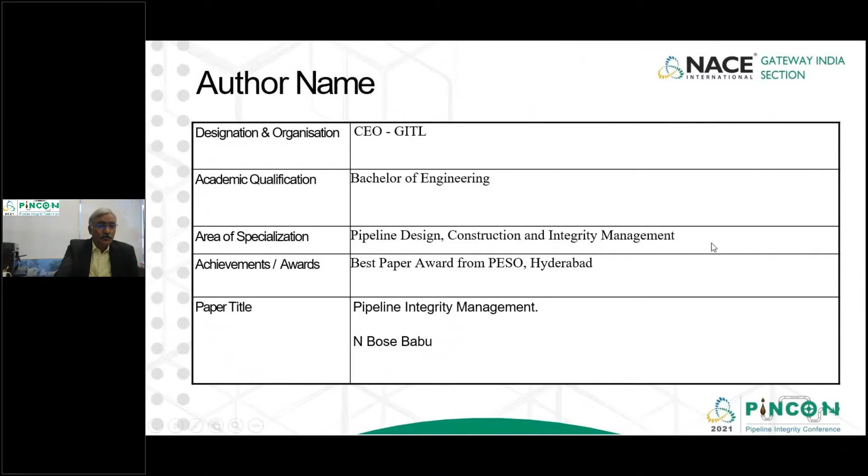First, let us understand what is pipeline integrity. There are so many definitions available in pipeline integrity, for example 32 comprehensive definitions from various authors. But what I like the best and the easiest to understand is: a comprehensive, systematic and integrated process that includes all the activities required to prevent a failure, because that is our main objective.

If you see this picture, I think it answers so many words, because I call it a very important picture, which is seen and unseen. What you see is very small, but what is hidden behind is very big. That's where I think integrity comes into picture.

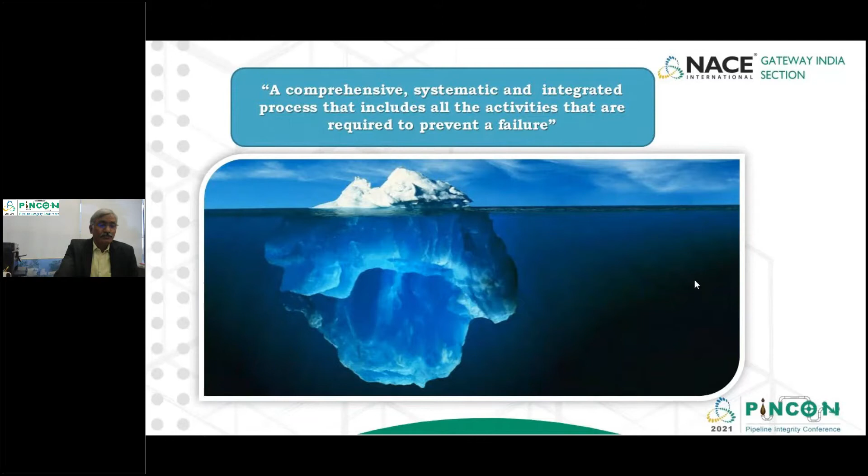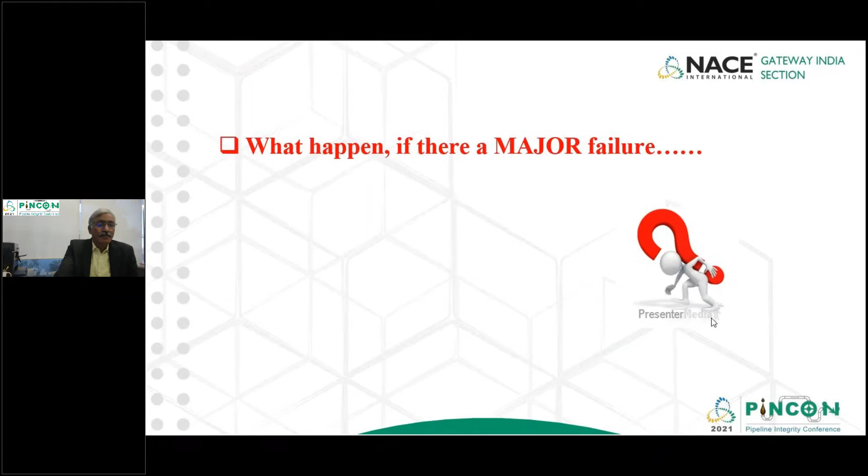So let's think what happens if there is a major failure, because we as operators or general public are concerned about failures. What happens if there is a major failure or rupture? It can be loss of life, loss of property, and damage to environment—all three can happen, or maybe one, because there is a loss. So our job as integrity management engineers is to prevent all these things and safeguard the public.

Now let's come to the few elements of integrity management. Integrity management is very clearly defined in ASME B31.8S, 2004. And even now in 2012, the Petroleum and Natural Gas Regulatory Board has already notified the regulations for integrity management. It covers things very simply, easy to understand and easy to implement. In fact, integrity program is not such a complex thing.

It comes down to 5 main elements: integrity plan, performance, communication, management of change, and quality control. These are the key 5 elements, because the entire process runs based on the PDCA cycle: plan, do, check, act. It's as good as what we follow in our QMS.

If you see the entire integrity program, it is defined in a process flow. It's very simple—the entire integrity management program runs only in this flow diagram. If we go through it, everything is laid out here as headlines.

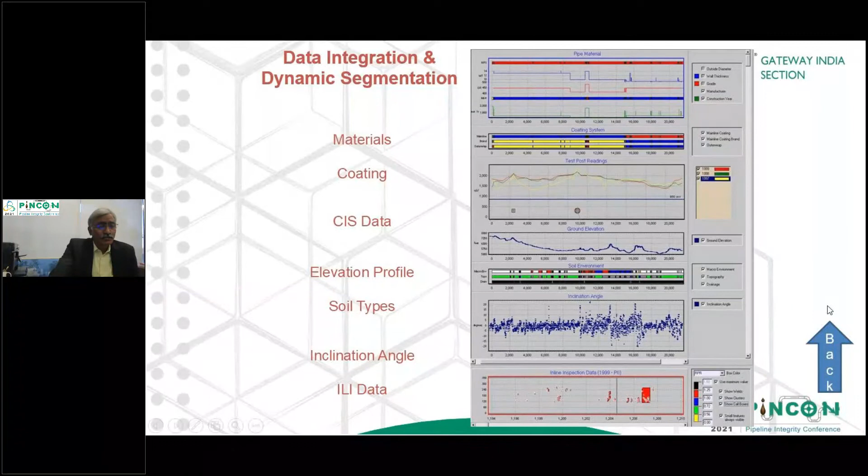If you see this picture, when we want to really apply proper integrity management, we need to have a comprehensive overall picture in mind—basic information of pipeline materials, what type of coating you have, what type of soil conditions, what is the profile of the pipeline, and various other data, once you start the baseline data like ILI, geometry, or as-built data. If this information is made available, only then can we start the integrity process.

Once you have this kind of information put together in the proper format for the right kind of decision, then you should start looking at risk assessment. So what is risk assessment? Risk assessment can do a lot of things for integrity engineers. First, it will give an idea of where the next failure will happen, because it just gives an indication—it doesn't tell anything exactly. Where are the hotspots?

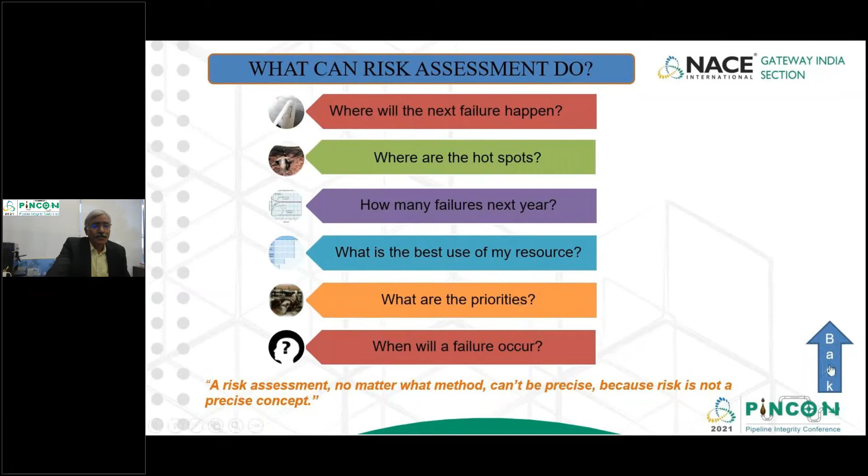Because you cannot look at the entire pipeline project, you have to identify the hotspots in the line where you need to give your attention, and how many failures can take place, because it gives some idea. And how best you can use your resources, because you have limited resources, you are not given resources to take care of the entire pipeline. So you have to prioritize your activities, and accordingly do the failure analysis, and then prevent a failure. So whatever the best risk assessment you do, the risk cannot be zero, so you have to be very careful in doing this risk assessment.

After carrying out this risk assessment, you apply threats. There are 22 threats identified by the standard, where you can apply each and every threat if it is applicable. If it doesn't apply, you just go to the next. So you apply all the threats. If that is done, you go to the integrity assessment, then do the response and the mitigation integrity activities. Otherwise, you go back to the initial phase, gather the required data again, and apply the risk assessment again.

So what is integrity assessment? There are three main types we have identified. One is the pipeline hydro test, that shows the integrity of the entire pipeline system so we can commission it safely. Another one is ILI, inline inspections, which if done in the beginning is treated as a baseline, and it can be done again at 5 or 10 years, because 10 years is mandatory as per Indian regulations. The third integrity assessment method is direct assessment - external corrosion direct assessment, internal corrosion direct assessment, and stress corrosion cracking method. You apply whatever method is best suitable based on the pipeline life and other actual issues.

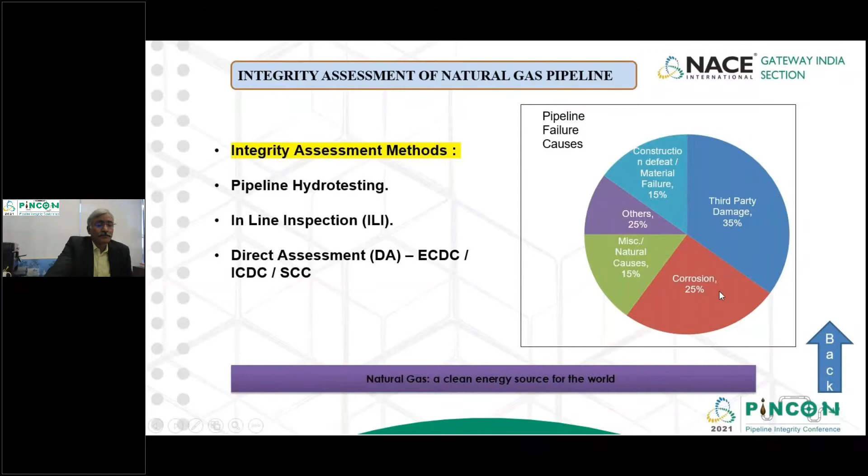If you see the failure causes pie chart, 35% of the damages are caused because of third party areas, which is beyond the operator's control. 25% is mainly because of corrosion, because this is a big area and big concern, either internal or external, whatever it may be. So we need to be very careful in dealing with that.

So after this integrity assessment is done, then you have to have the response to the integrity assessment. Okay, now let's go back to the threats.

As per the standard, there are 22 threats identified. 21 are actually really identified threats. One threat is called unknown, because there is something that so far has not been identified very specifically as a root cause, so it has been identified as unknown.

So the program of integrity management is given in two types. One is prescriptive type, or you can go with performance based type. Prescriptive type of program is very conservative but easier to implement, because you have defined the frequency - like when you do CP readings, when you do geometry, when you do ILI, when you do the Pearson survey - various activities are very clearly spelled out and you just have to do it. Based on implementation of this, you can do some corrective and mitigation actions. The second is performance based, which is more flexible but requires significant data analysis and experience. We have just very recently started this integrity program in India, so we need some maturity in implementing integrity programs purely on performance based, because performance based means if you find a need, you may do it more frequently, and if not required, you may not do it. So that may not bring very clear confidence in this area, so it's better to go with the prescriptive type as of now. But operators have a right to select either of the programs based on their confidence level.

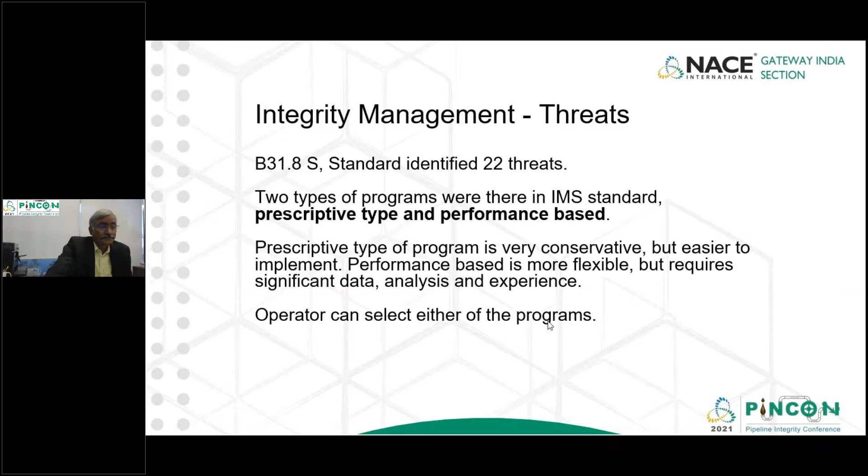So these pipeline threats, 21 or 22, are categorized into mainly three areas: time dependent, time independent, and stable. Let's understand what time dependent means. Time dependent mainly impacts are like external corrosion, because it's related to time - over a period of time, the corrosion can increase, the wall thickness will reduce, and then the probability of failure will increase.

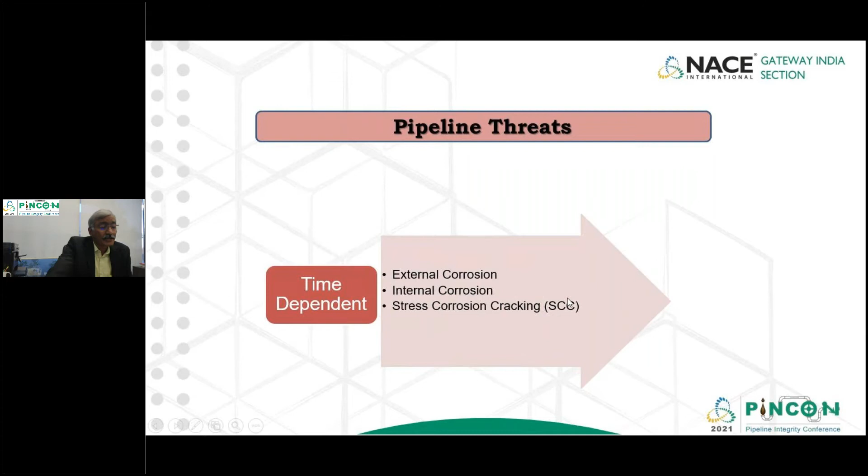Similarly, internal corrosion may not affect the pipeline at T1, but the more the usage of the pipeline and the age, failure due to internal corrosion and stress corrosion cracking can take place even as early as 2 or 3 years. So we cannot simply say this can only happen after 10 or 15 years. All corrosions can fail even as early as 2 to 3 years, so it should not be a surprise.

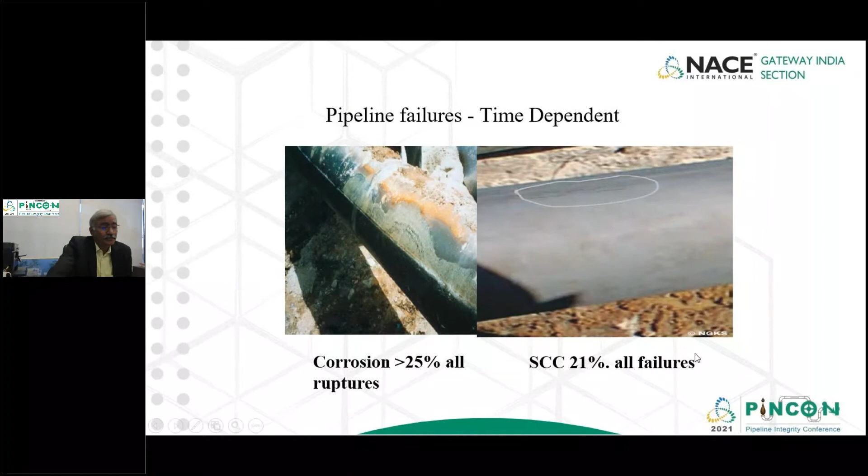If you see here, pipeline failures because of time dependent factors: 25% is because of corrosion, and 21% of the failures have been seen because of stress corrosion cracking, which has been observed in some parts of the globe. Now come to the stable, or what's called resident defects.

Recently the terminology changed from stable to resident defects. Resident defects are defects which are not that harmful, which have been tested during the manufacturing stage or during welding or because of the equipment. It has already been tested and withstands the particular pressure requirements. Hence these are treated as stable or resident defects.

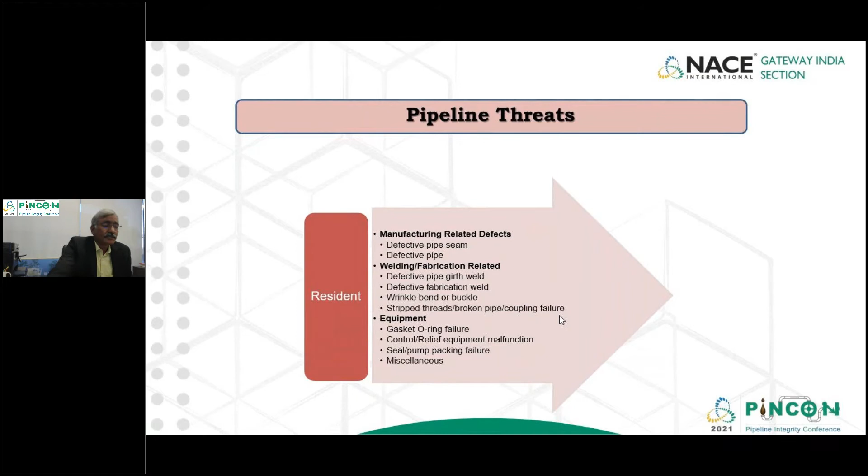So over a period of time it doesn't have much effect because they are treated as harmless with reference to time. The third category is time independent, which is very important, as we already saw in that slide. Third party damage is one of the biggest issues. It can happen the day you commission the pipeline, after 1 month, or after 1 year. We never know, we don't have any control.

Damages can be done by the first party, second party, or third party. Anything can happen, or it can be sabotage if you are in vulnerable areas. Second most important is incorrect operations, because this has nothing to do with time - people may operate wrongly, beyond design conditions or maximum allowable operating pressures. Then things can go wrong, which is why it's categorized under time independent.

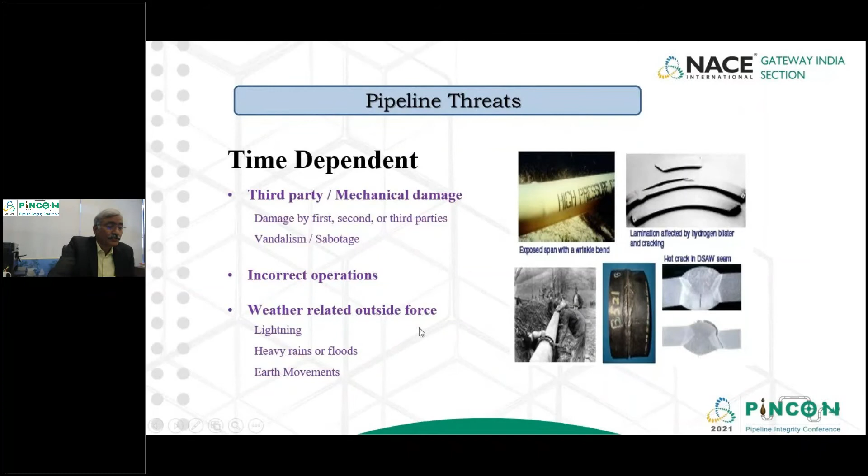Weather related threats are a major concern, because lately we find a lot of deaths because of lightning, floods, and natural disasters. So if the pipeline is in this type of area, we need to be more careful looking into this type of threat, depending on the area of the pipeline.

The integrity methods are hydro test, inline inspection, and direct assessment. We need to see, because hydro test is not possible after commissioning - it's only possible before commissioning of the pipeline. Once it's commissioned, hydro test becomes a big issue - you can't stop the supply of gas to do that hydro test, which is very rarely possible after commissioning.

So the best possible option is ILI, which we can do very easily wherever applicable - ILI is the best thing to do. There are pipelines, especially small pipelines, not cross-country pipelines, where you don't have pigging facilities, or pipelines done very long back, 20 or 30 years ago - for those it's better to go for direct assessment.

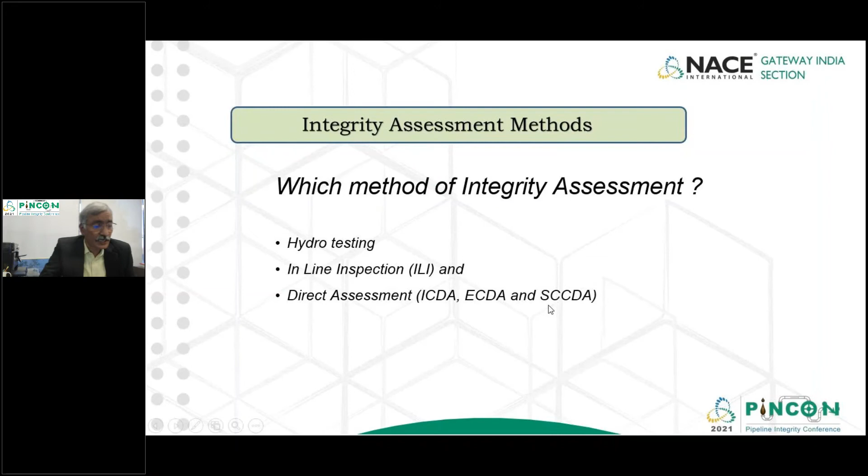So there are again ICDA, ECDA, and SCCDA based on the nature of the defects identified, which you can apply there. Hydro test, pressure testing, demonstrates the integrity of the pipeline but provides no information on remaining anomalies - it's like a pass or fail, it's a go or no-go type test.

But it is always better - you know that it is tested at 1.4 times the design pressure. So there is always a comfort in the operator's mind that it has been tested with water.

It must therefore be repeated periodically. If you want to go for hydro test, you do it after 5 years also, because it has to be repeated over a period of time to avoid and prevent further failures.

The higher the test pressure, the better the safety margins. In current days, it is preferred to do the spike test even for a short while, a few minutes, at the maximum pressure available, 90% SMYS, or even it can go to 95% or 100%, subject to the agreement you have with the line pipe manufacturers.

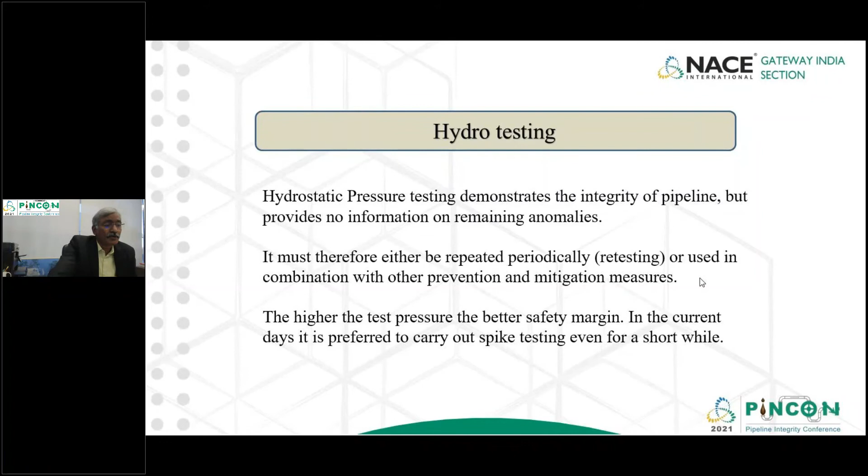Inline inspection tools take indirect measurements of pipeline defects, because it is done through the magnetic flux leakage method. Through experience, we can quantify the level of tool imprecisions, but we cannot remove it by ILI. It will give only where you have loss of thickness, either inside or outside, based on which you can adopt the proper repair and rectification methodology.

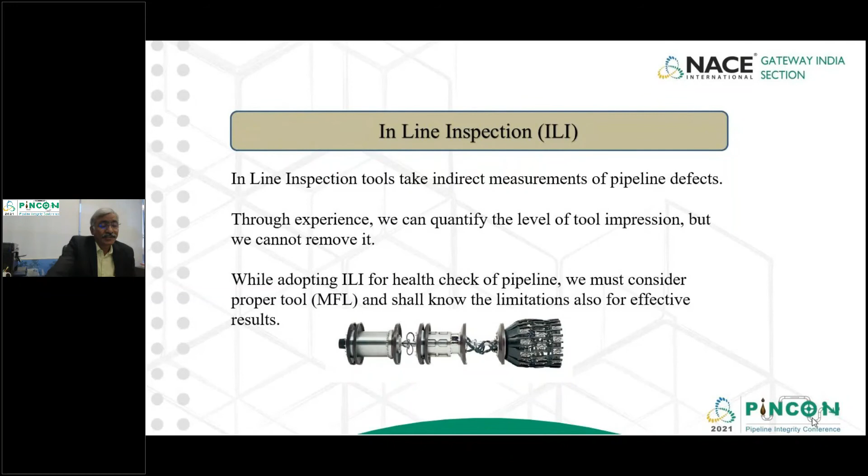While adopting ILI for health checkup of the pipeline, we must consider the proper tools, which is very important, because people should not just blindly do it. There are many ILIs in the name of the tool, but there is accuracy requirement, there are limitations which should be understood for effective results for the project specifics.

For cracks, it's normally better to go for EMAT, or ultrasonic detection tools are also available. Ultrasonic has a limitation because it needs some lubricant, but EMAT is much more preferred to identify cracks. Again, it depends on the situation.

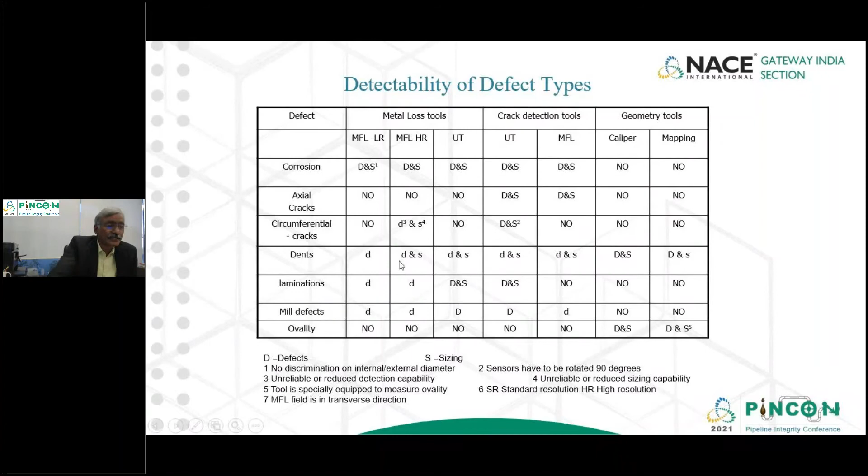External corrosion is one of the serious threats we find. We manage external corrosion with proper protective coatings like 3-layer PE, fusion bonded epoxy, dual layer, and various other coatings applied at the pipe mill itself. Subsequently, we have to apply temporary cathodic protection until the permanent cathodic protection is commissioned.

It's a general phenomenon we've seen that people just ignore the TCP even after lowering it for so many months, and that's very dangerous. So this information is required to implement a proper IMS. Though pipelines have impressed current methods, their efficiency and effectiveness need to be verified through subject matter experts, through audits or field verifications.

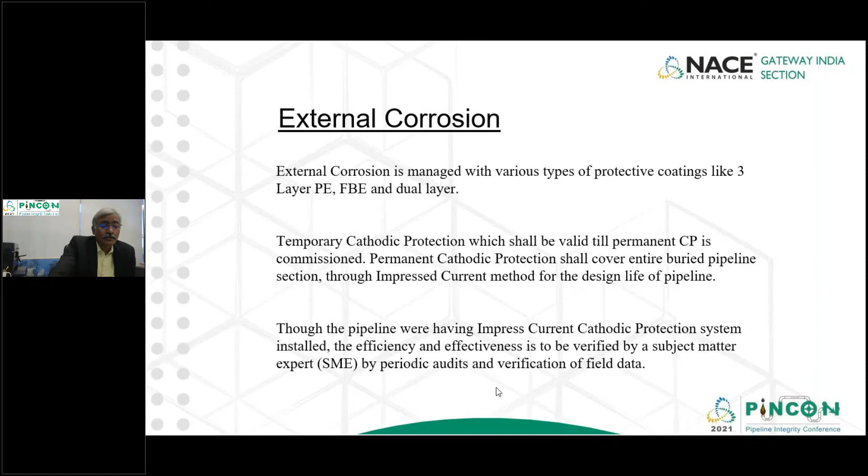Internal corrosion is one of the serious concerns, which happens mainly due to poor gas quality. If the quality of gas is not proper, it has to be identified as off-spec gas, and people should not accept that, so as to avoid internal corrosion. It's a serious problem, but it can be easily managed.

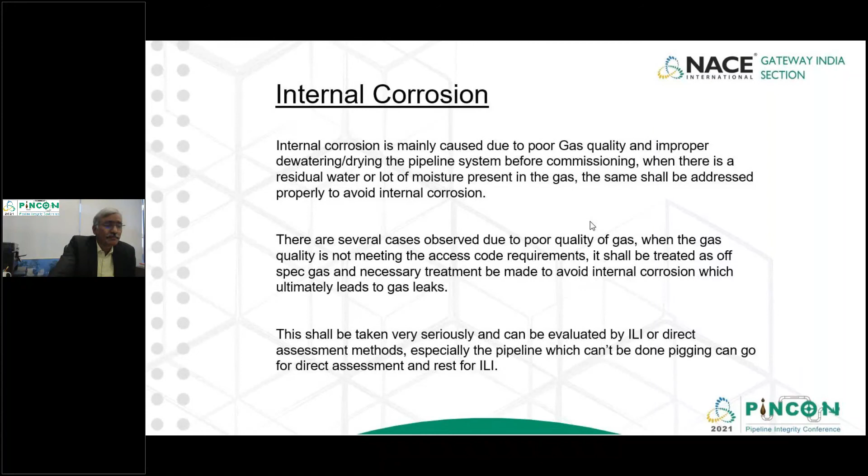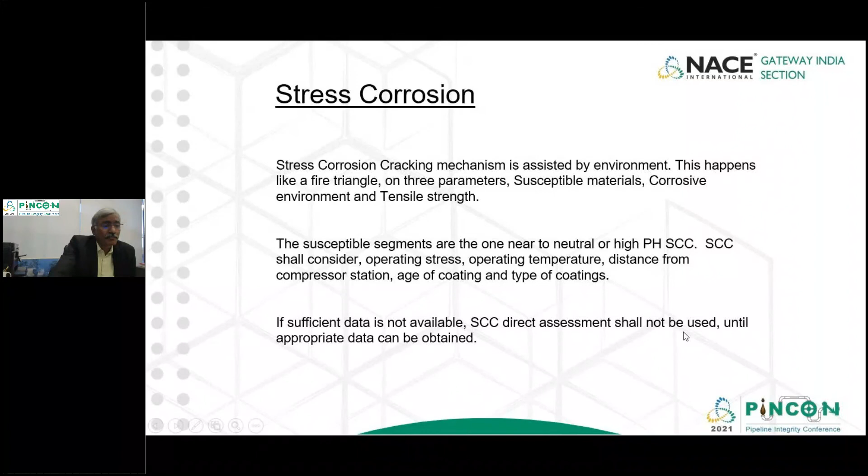Stress corrosion cracking mechanism is mainly assisted by the environment. This happens like a fire triangle with three parameters: susceptible materials, corrosive environment, and tensile strength, mainly due to the quality of soil around. If you don't have proper and sufficient data, you should not apply SCC analysis. You find fine line cracks in this case.

After applying all these things, the important part is the response, because it is very important. Once you know something, you have to apply the proper repair method. If the loss of metal is 80%, you have to do immediate repair or reduce operating pressures. If it is normal, you do scheduled repairs within 60 to 180 days, or monitor.

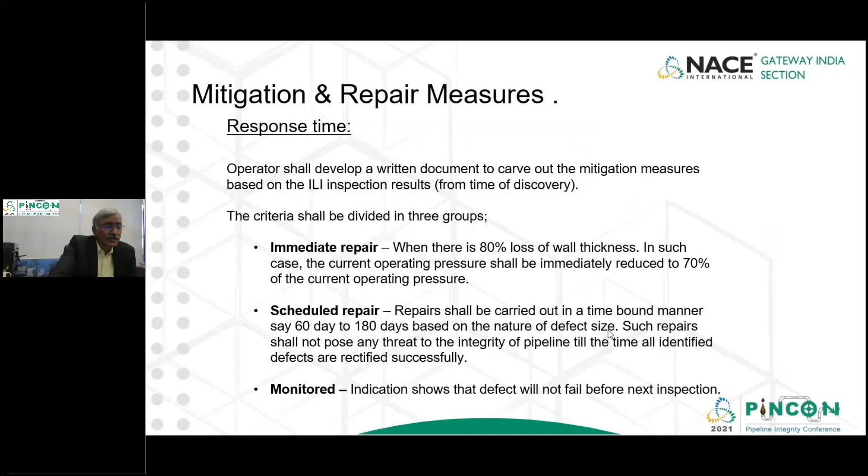So to sum up the session for today, what I can confidently say is that global experience demonstrates reduction of pipeline failures by adopting a pipeline integrity management system. All activities that affect the safety and integrity of the pipeline system shall be performed by qualified and experienced personnel. This is very important.

High consequence areas shall be identified on each section of the pipeline. It is up to the operators to carry out and apply all the threats in each high consequence area. Pipeline operators shall share learnings from experience of IMS implementation with other industry members through seminars, conferences, or workshops, or other educational means, so that other operators do not make the same mistakes. Sound O&M practices, legal and ethical responsibilities will ultimately increase public confidence.